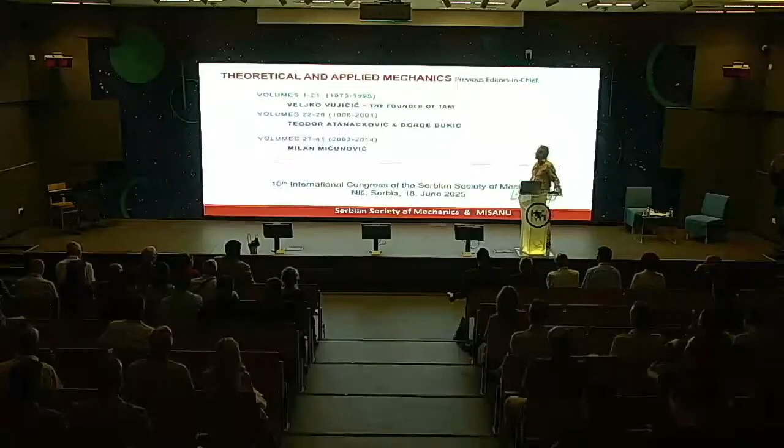The journal was established thanks to the leadership and wisdom of the late Professor Veljko Vujičić, who served as the founding editor. Then this torch of editing was carried on by Professors Teodor Atanacković and Đorđe Đukić, and then Milan Mićunović. So let's thank our previous editors-in-chief for this tremendous work over decades.

We are trying to stay in touch with modern ways of presentation. As I told you, this is free of charge for authors and for readers. We have all our previous issues maintained online, so you have free access to all of them.

And here is again one piece of history. Here you see the first editorial board from 1975. At that time, as Professor Simic said, it was published jointly by the Yugoslav Society of Mechanics and the Mathematical Institute of the Serbian Academy of Sciences and Arts. In 1975, this was the first volume, the first issue.

And just 50 years later, we have this Jubilee volume, and here is the list of authors who contributed to this year's volume. So, in hard copy, our journal looks like this.

Once again, here are the basic data, and this is also our cordial invitation to all of you, to all members of the Serbian Society of Mechanics, to all scientists in the field of mechanics around the world, to our plenary lecturers, and to all participants of this Congress.

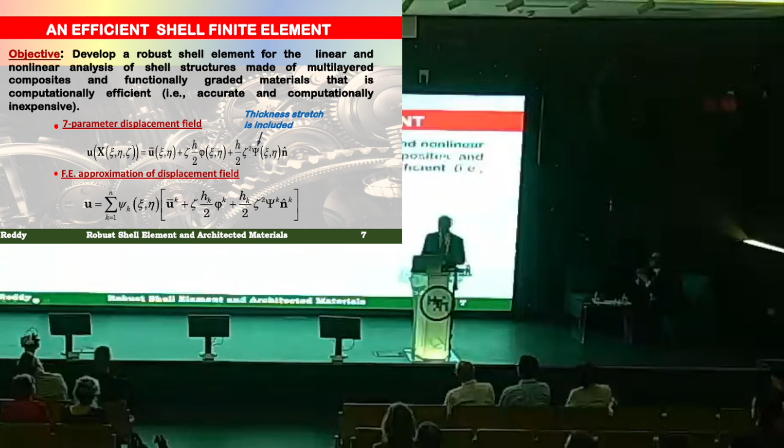So it is a displacement vector which is decomposed into in-plane, in-surface displacements, then rotations about all three normal axes, which is in the element phi. Let me see if this works. Yeah, good. So you can see this as a rotation, and then we add to that a degree of freedom, that is what I call thickness stretch. It allows a degree of freedom, allowing the thickness to change. It can reduce or increase depending upon whether it's a tensile or compressive load.

So then we go on to develop the finite element interpolation, and I will just show you a mid-surface of a shell. One other thing that we have done, not in the commercial code, is to use what we call spectral interpolation functions, because in order to get rid of all types of thickness locking, shear locking, Poisson locking, we need to use a higher order interpolation. The reason is, as I mentioned, the rotation functions and the translational displacements are not the same degree of interpolation. They require different treatment.

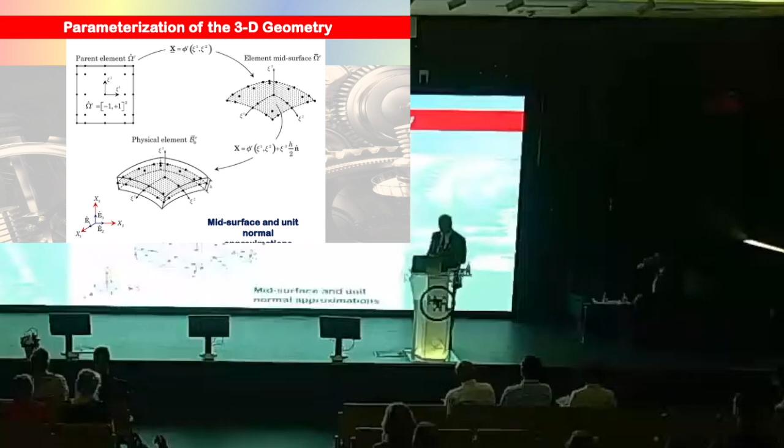But we don't want to use mixed interpolation because it's computationally difficult, both in terms of meshing and programming. So we tend to use equal degree interpolation, but a higher order, so that we can get rid of all kinds of locking. This picture shows the actual interpolation for different variables, and for the instantaneous location as well as the original location, shown by the capital X. We use the geometric interpolations for the geometry of shells, and since it's a large deformation problem, we use the Green strain tensor, written at the top of the screen.

Let me show you, right here, the Green strain tensor in terms of metric tensor components. Then when it comes to the strain displacement equations, because of the curvilinear nature of the shell equations, even though we start with the first order thickness interpolation, it goes all the way to the fourth degree of the thickness coordinate, as shown here.

So it is a question of where you want to cut off. We tried first with first order kinematics, retaining only the first term through the thickness, where Xi3 is the coordinate in the transverse direction to the shell. We also used what we call a 12 parameter model, not discussed here, just out of curiosity, to see if it brings additional accuracy. We found that the expense is not justifiable for the small amount of accuracy gained by including this quadratic term, so we neglected all of those terms in the shell theory.

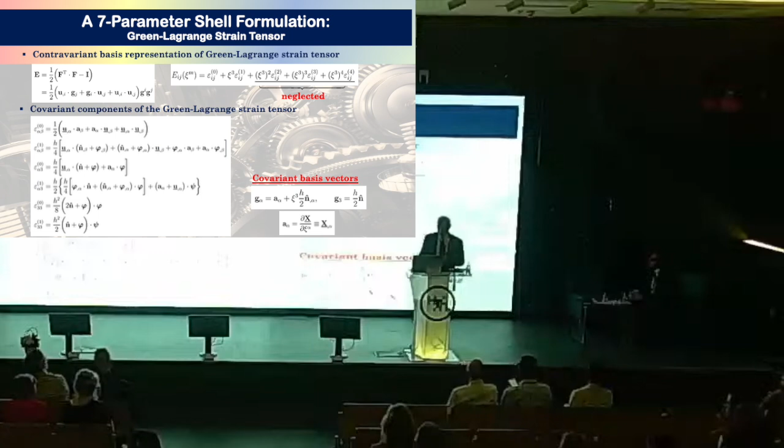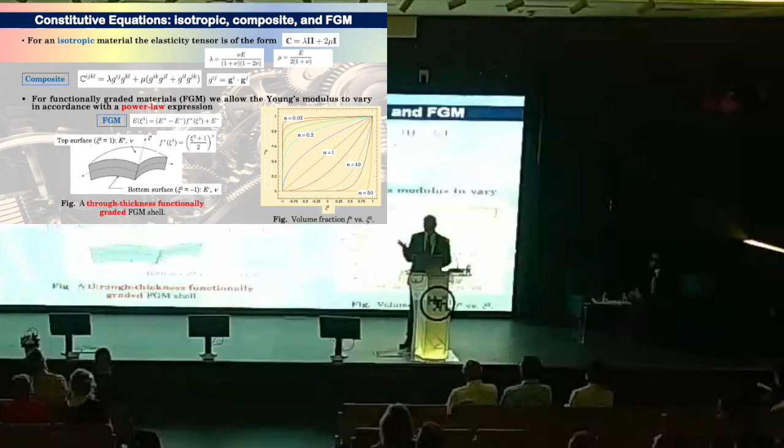The rest of the terms just show the number of terms in the strain displacement equations. In terms of the constitutive model, we account for isotropic, orthotropic, laminated structures, and functionally graded structures, where material can vary through thickness from one material at the bottom to a different material at the top. This is one thing that in recent years we are doing, bringing functional gradation of the material to get effective stiffness and strength at light weight. That's how architected materials and structures are being built, so that is really where the design is coming from.

As I mentioned about the spectral interpolation functions, the reason we need to use spectral functions is because they are well behaving. They are also Lagrange interpolation functions, except the distribution of the nodes is unequal. In the conventional case, if you have say some 10th degree polynomial, there would be 11 nodes in 1D, equally located, but they misbehave.

Okay, so you can see the typical commercial code will have p equal to 1 and 2, linear and quadratic. But you can go to p equal to 4, p equal to 8. So as you increase the degree of interpolation, one thing that you notice, there are more nodes going inside the element, right? You see a lot of nodes in the elements, and they don't speak to the neighboring elements. Only the nodes on the boundary of the element speak to the neighbors, right?

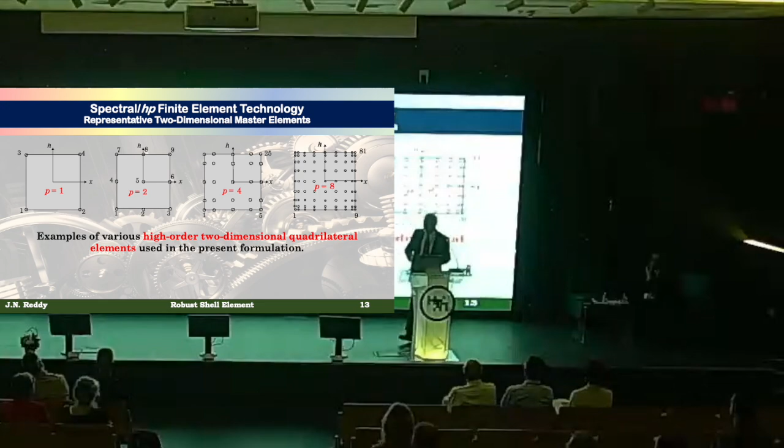Okay? So we can talk about other kinds of buckling phenomena or any kind of shear deformation. All of those are accounted through the first order kinematics. So this is another example. I want to show the importance of thickness stretch. So this is the internally pressurized cylinder. Okay, so, you think of a rubber balloon.

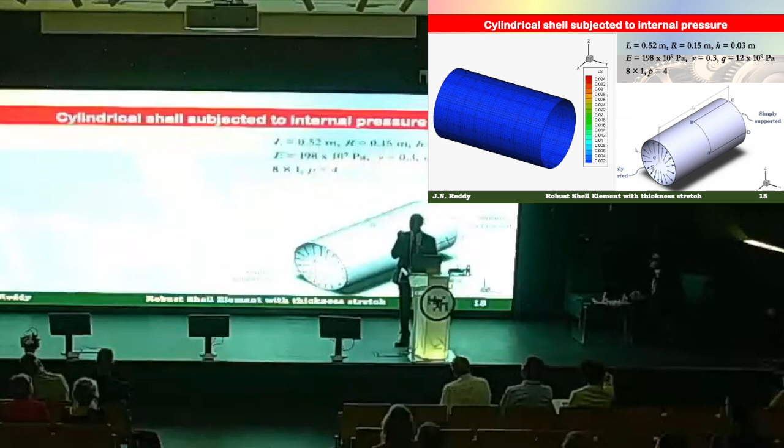When you take a balloon and start blowing air into it, what happens? It blows. But you can also see the color of the balloon changes because it's getting thinner and thinner. If you keep blowing, it will burst, because the thickness is not able to take the internal pressure anymore, right? So that means there is a thickness stretch, which is true, and I'm going to show here. Let me see if it works again. Oops, let me go back.

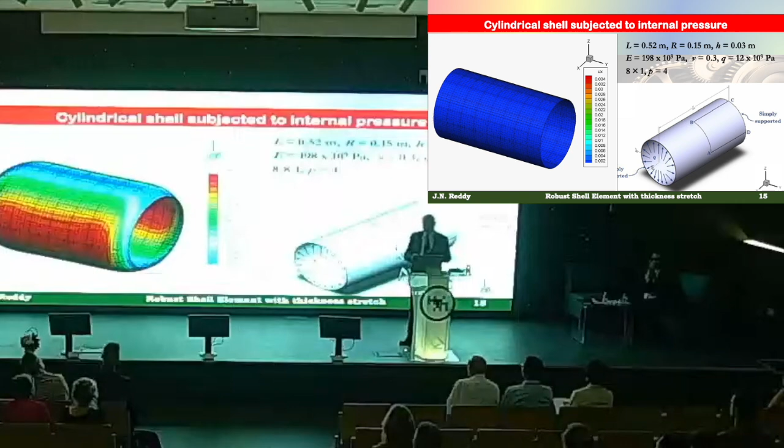Okay. So you can see the ends are held fixed, and so the internal pressure is going to make the diameter of the shell increase. So the shell diameter will increase only by making the shell thickness change. Right? Material has to flow from somewhere to create a bigger shell. So that's what you are seeing. And so if you really plot the

so this is the plot of the thickness change, delta H over H. H is the thickness, delta H is the thickness change. So I'm putting the ratio. It can change as much as 15 or 25. I showed 25 in the scale, but it goes all the way to 20%. Okay, but this has to be large deformation. I don't want you to think that every problem will have 25%. No. It has to be a large deformation problem.

All right. So we also show the stresses. This is very important. There are many graphs here, but I want to talk about one at a time. So the two most commonly used commercial programs for structures are ANSYS and Abaqus. Market-wise, ANSYS probably has 60% of the market, and Abaqus has 40%. But when it comes to structures, the percentage is reversed. Abaqus is most commonly used for structures.

So what you are seeing here is the stress we are plotting at a point, the load parameter versus the stress. And so the ANSYS and Abaqus results, they agree with each other. Okay? Those are the shell element results. But if you take the 3D, all right? 3D ANSYS and Abaqus, 3D elements.

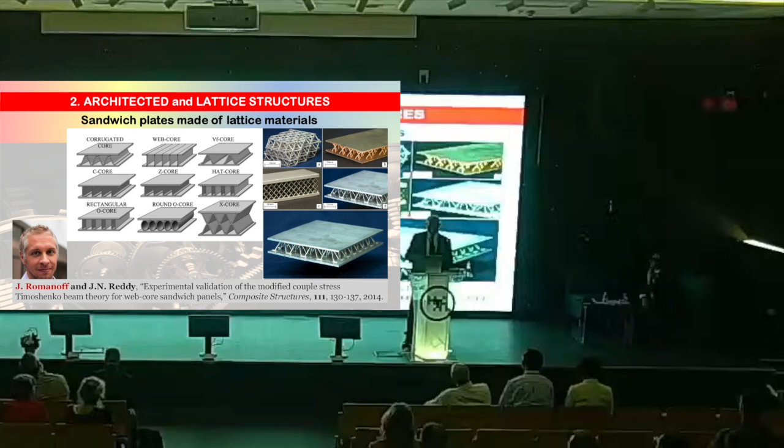So I worked with Jani Romanoff from Finland, and he was helping with experiments. And so what we have done is the following. So there are two possibilities. You can take an architected structure and replace it with a continuum model. But that is going to lose all the identity, because you don't know what the architecture is, other than you have effective stiffness coefficients, okay?

And the other way is to actually replace each one of those ligaments by a frame model, okay, 3D space frame. So that would be more accurate, but it will be many, many degrees of freedom, because there are millions of these ligaments. So what we have done is to do the first one, but we refine the theory. That means bring in a point rotation.

I don't know how many of you recall, our classical continuum mechanics does not allow a point to rotate. It allows the point to translate. Or 2 points connected can rotate, but a point itself cannot rotate. Okay, so this is where the micropolar theory comes in. Okay, so that's what we have done.

So you can see an architected structure. This is where Jani's PhD student, Anssi, had a Marie Curie fellowship to spend 2 years with me at Texas A&M. So they also did the experiments in Finland. You can see this is a very simple architected structure with a web core, top and bottom plates with a simple web there.

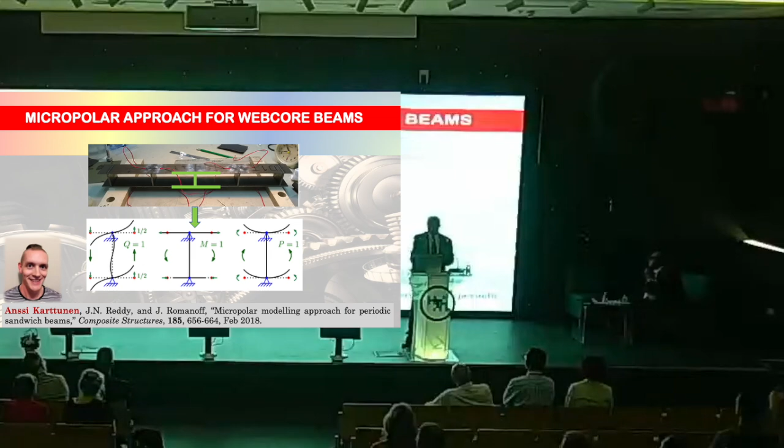So if you really exaggerate this deformation, what is happening is that web actually bends, okay, and it can even buckle, right? So how do we account for the web in a more realistic way? And that is where we brought this point rotation and were able to capture, as I will show in the next couple of slides. So what we do is take the actual architected plate, in this case a very simple sandwich structure with a web, vertical web.

We take a typical unit cell and use Abaqus or ANSYS to get the solution at the nodes of that typical unit cell. Then we come up with the actual theory, the plate theory. But except we bring the point rotation through psi x and psi y, that means we allow the rotations about the axis at a point, okay? So then we create a two-dimensional theory as opposed to shell type three-dimensional, and use the energy equivalence.

That means energy coming from that unit cell should be same as the energy the micropolar plate theory does. So we relate the degrees of freedom from the three-dimensional unit cell to the two-dimensional theory and calculate all the ABD matrices of a shell element. Okay, that ADGH. So we cannot write an expression for them, but we can get them numerically by comparison, as I showed with the transformation on the screen. Okay, so there is a lot of detail that I'm skipping, but I gave the general idea.

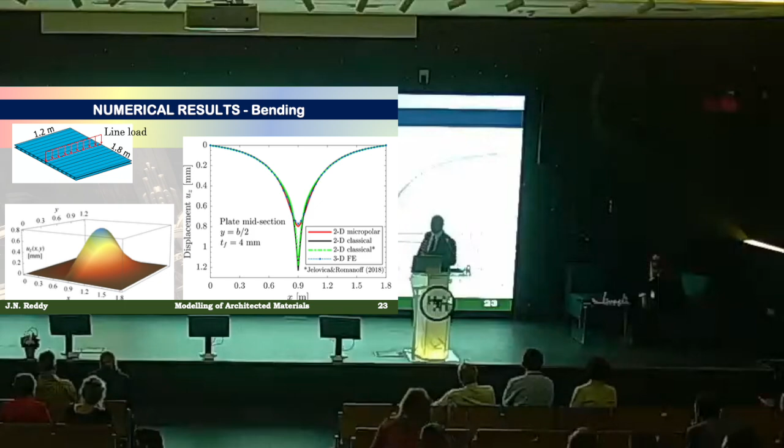So you can see the red curve is the 2D micropolar theory, that is ours. The blue is 3D shell finite elements. Okay? So you can see the micropolar theory is capturing the 3D response, whereas the classical one will have as much as 20% error. Okay? And we have done this for buckling as well.

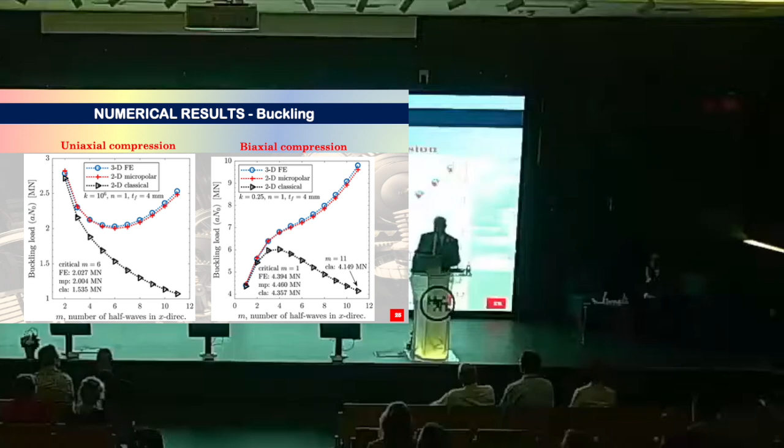Here this number of half waves is shown here. So that means even higher modes of buckling are predicted much more accurately, whereas classical theory really deteriorates with the number of half waves. And we did the similar thing for biaxial compression. Take the plate, compress in both directions. So once again you see the accuracy is very good between the micropolar theory and 3D finite elements.

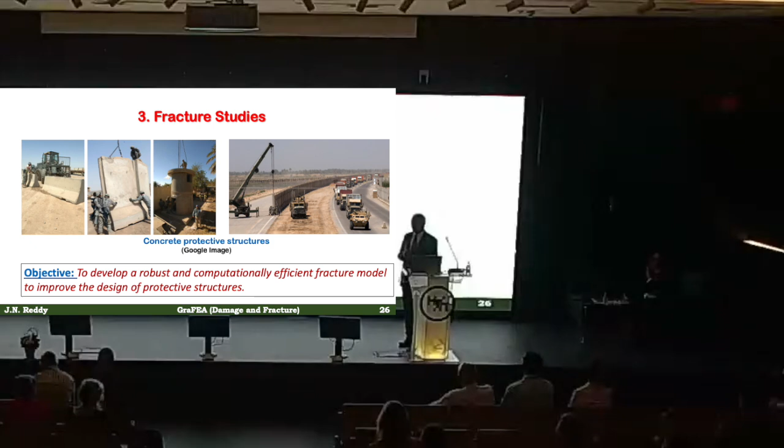So the third topic is fracture. And these are kind of not connected to each other, but this is a very important topic because everything that you talk about, whether it's buckling, architected structures, bending, all those, ultimately we are interested in when do they fail? What is the probability of failure? What is the residual strength of the structure? What is the life of these components? So that is why fracture is a very important topic.

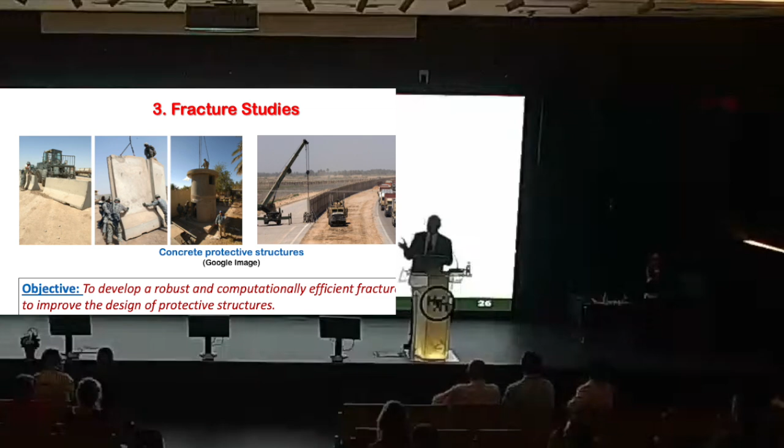The unfortunate issue with fracture is continuum mechanics cannot deal with fracture. I don't know how many of you closely understood that. Fracture mechanics is not a part of continuum mechanics. Okay? Because we cannot have an interior point become a boundary point. Right? When a flaw starts and coalesces into a crack, the crack is now on the boundary. So this is the problem with continuum mechanics. So we found a way to get away from it by creating some models. All of the models have some different flaws, but I don't want to just mention that without substantiating, so I will do that in a minute.

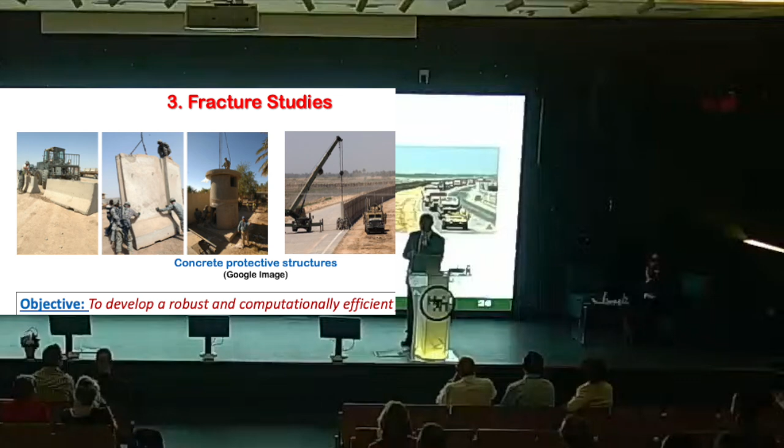So these are mostly, we are spending time on brittle and quasi-brittle materials. So this is a concrete slab, okay? And we want to actually model the fracture in concrete. And all of you know, I'm sure, concrete, even before it is in service, it has many cracks, just by the way it is made, the settling takes place, right?

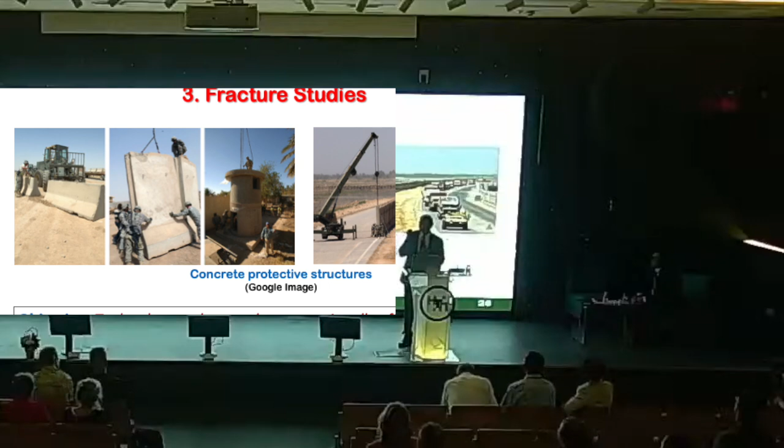And most of the conventional approaches, there are thousands of papers using XFEM, cohesive zone model, now phase field, peridynamics, but they all talk about typically a couple of cracks. Most of the time one crack. Okay? So if you have many cracks, only peridynamics-like ones have the ability to capture them, but all others deal with only one or two cracks.

On top of it, all of them require your understanding of where the crack is going to go. That human intervention is required so that you can lay the mesh, you can lay the cohesive zone elements. So this is almost like cheating because you already know where it is going to go. That doesn't happen in the real world. You don't know, other than simple problems where you know how the self-similar crack growth takes place. So we need a more robust computational technique.

So that is what we are interested in, and we want to develop a methodology that is not mesh dependent. You have to have a certain minimum mesh, there is no question. But as you refine the mesh, it has to converge. It cannot keep changing the state of stress. Okay? So that is what we are interested in. And we found, I will explain to you more idea-wise, that you have to bring non-local nature into it. And I'll explain what that non-local is.

So there are two major ways that people have addressed fracture. One is continuum-based models. That is where linear elastic fracture mechanics, continuum damage mechanics, XFEM, that means extended finite element, that means enrich the mesh in a certain way so that you can capture the singularity. Then the second class is bond breakage models. That means you assume that any two particles are connected by a bond, and it breaks when that bond strength, measured as a strain or stress, exceeds the allowable. So that is a very neat thing actually. So that is the non-continuum bond breakage model.

So the problem with bond breakage is it's not coming from continuum mechanics, and continuum mechanics has saved us a lot of frustration, because it has helped us solve a lot of engineering problems in the world. So it is a very nice tool. But when it comes to fracture, there is an issue.

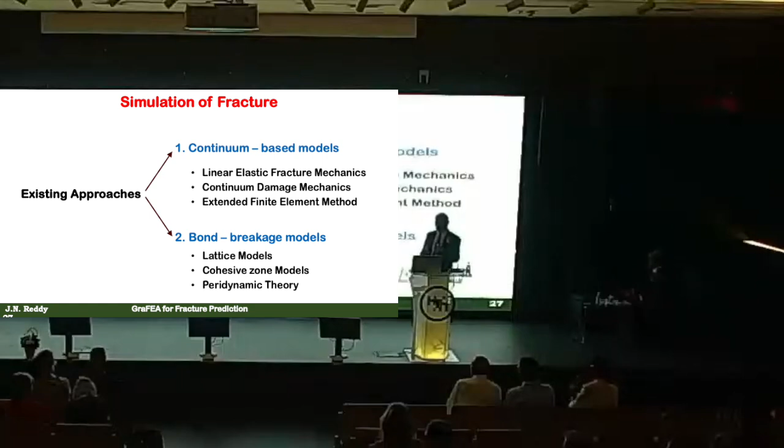That is where we need to use continuum mechanics models, because cracks are not everywhere. There are only a few places. So we should have the continuum assumption in most of the system or structure, and only in a few places we need the fracture. So we need both bond breakage and continuum ideas in one, and that is what this GraFEA is. Graph-based finite elements. There is no new finite element here. Same old, except we bring non-locality.

So the key challenge is the computational cost when it comes to, again, fracture. So in all of this, the common thing is we want to have simplicity and robustness. That means we should not have these knobs and fixes that only people who understand the problem can play with. The users are not like that. So they are depending on your ability to make it robust enough so that they don't have to think too much. So this is where we want to reduce the computational effort.

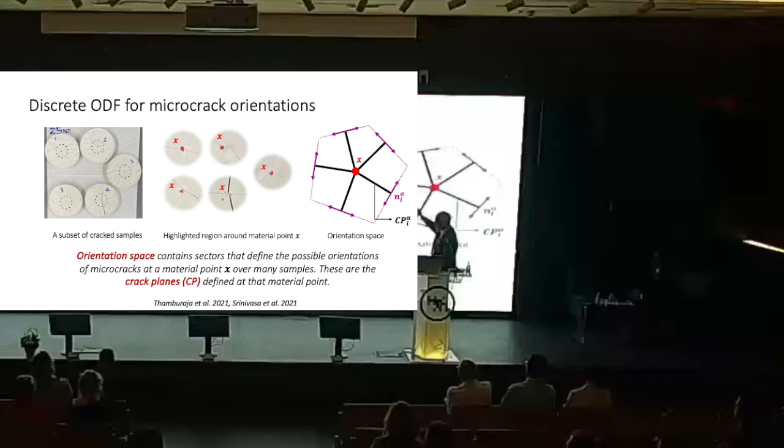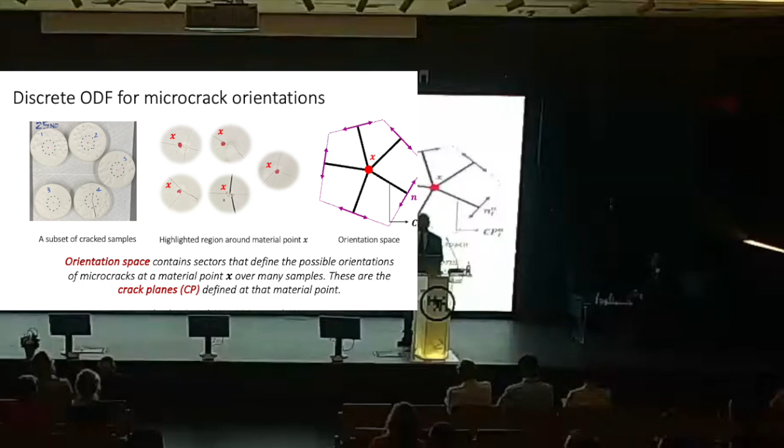By the way, Bazant's microplane model required 32 planes. And he doesn't have any answer why. But that's how he says it: it doesn't work unless you use 32 planes. He was with me 2 months ago. I invited him to give a seminar to discuss the microplane model. So we created this microplane model of our own, which only required 3 in 2D and 6 in 3D.

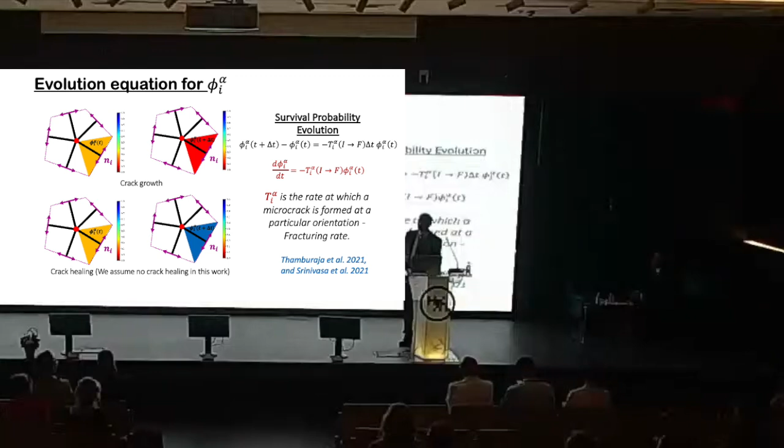So the evolution of this survival probability is what we monitor. And then we have a rate equation for how it evolves. We found that we need to have a certain number of parameters that need to be physical, including Poisson's ratio, modulus of elasticity, the rate at which the strains evolve, and strain rate effects themselves. So all of these we bring in through our non-local GraFEA model.

By the way, papers based on this work have appeared in very top-notch journals, Royal Society of London, JMPS, Extreme Mechanics Letters, and so on. If you are interested, I would be happy to send you them. But not only that, I will be happy to give you the program, the UMAT. The finite elements is not new here. What we did in terms of non-locality is new. So we created a UMAT for Abaqus. I will be happy to give it to you, so that you run it, use it, tell us your experience and how we can help.

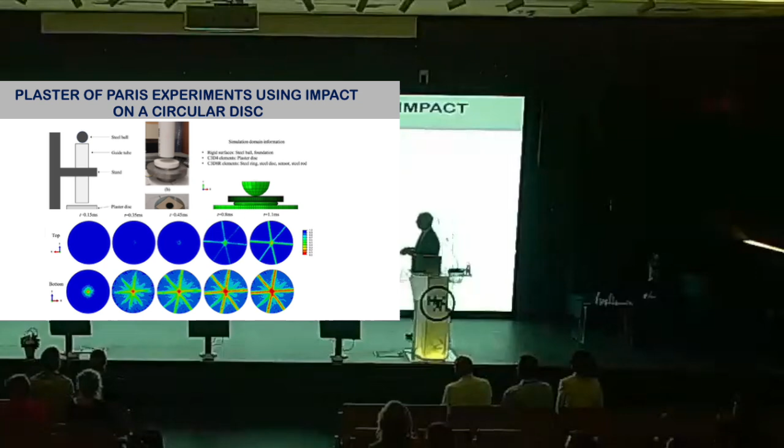So we started doing our own experiments, simple experiments - drop tests on plaster of Paris material. We created these discs and used a tube to drop a steel ball.

Then we model using finite elements, and you can see the top of the disc and bottom. When it is coming from the top, fracture actually initiates at the bottom, not at the top, because of the tensile wave that comes from the bottom.

So you can see those are the GraFEA predictions, and there are experiments which also show this - those are experiments from Bazant and his group. We are able to predict very close to what is observed in experiment.

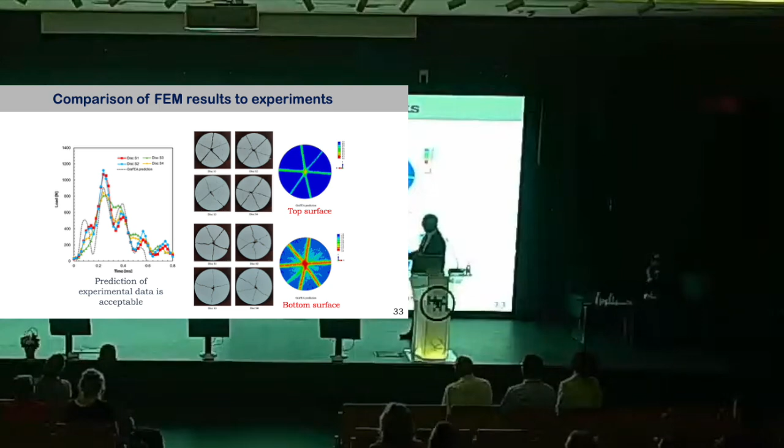By the way, different experiments show slightly different results. Even experiments change - you don't get exactly the same thing every time you do the drop test. So we were able to capture those using GraFEA.

So this is the cracking, it begins again at the bottom, and I have a movie, but I don't know... so you can see, all right. I'm going to just close this. So again, on the left are the experiments, on the right are computations. We are able to predict very well in terms of qualitative understanding.

Okay, I will close this lecture by summarizing three topics. First, the higher order shell element - higher order in terms of interpolation is necessary to get rid of all kinds of locking. This is where the commercial codes have to change.

The second is non-local ideas to capture or represent architected materials more close to reality, short of representing every ligament with a frame element. And GraFEA is the only computational...

...thermodynamically consistent approach. By the way, the phase field and peridynamics methods both have an exponentially growing number of publications, but yet they are thermodynamically inconsistent. You should read the critical papers by Bazant - he says these are nonsense, but nobody seems to pay attention. They keep writing the papers.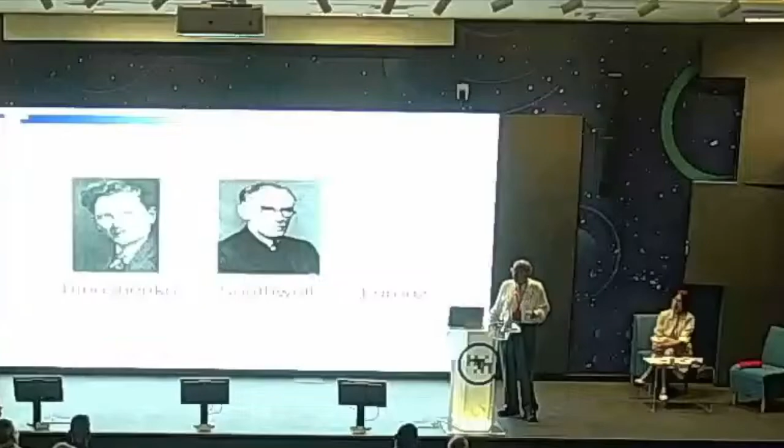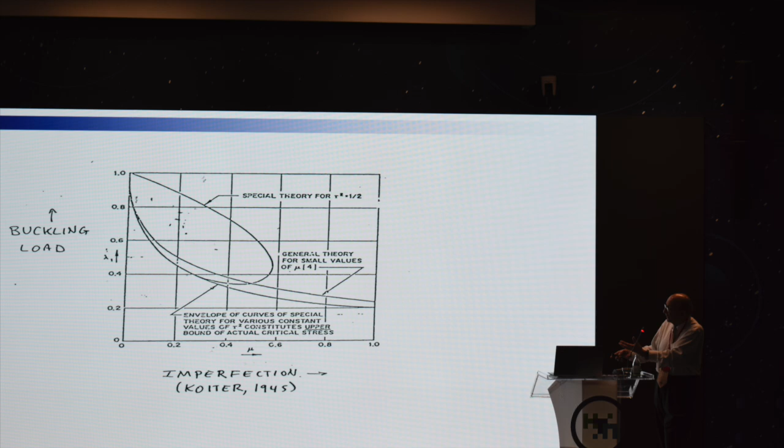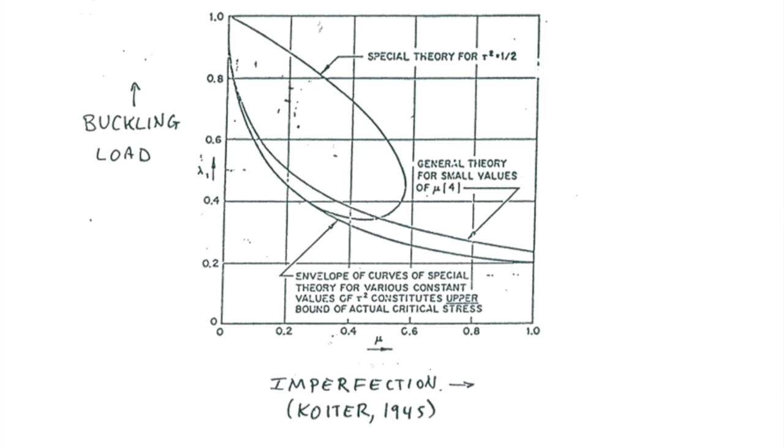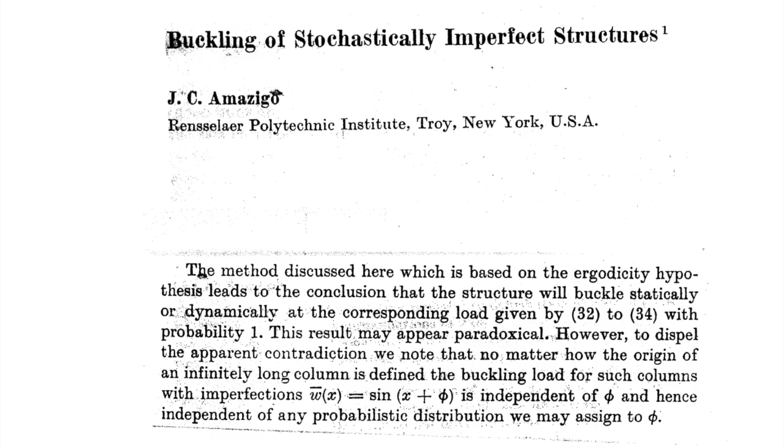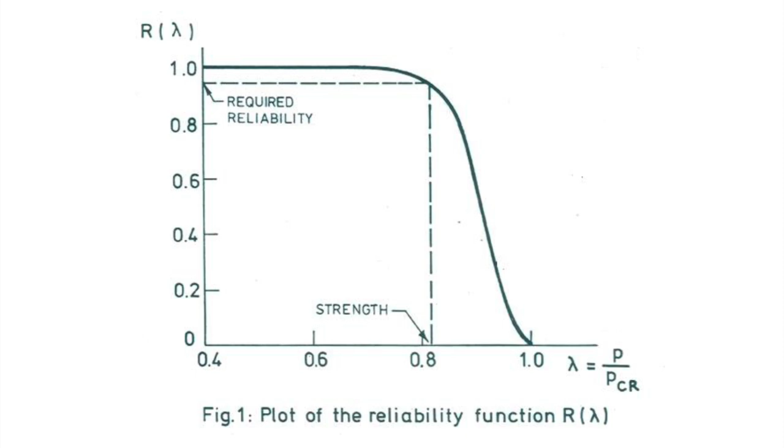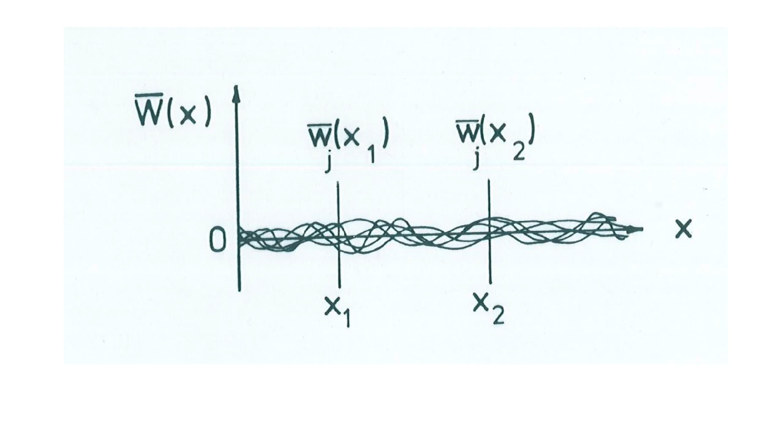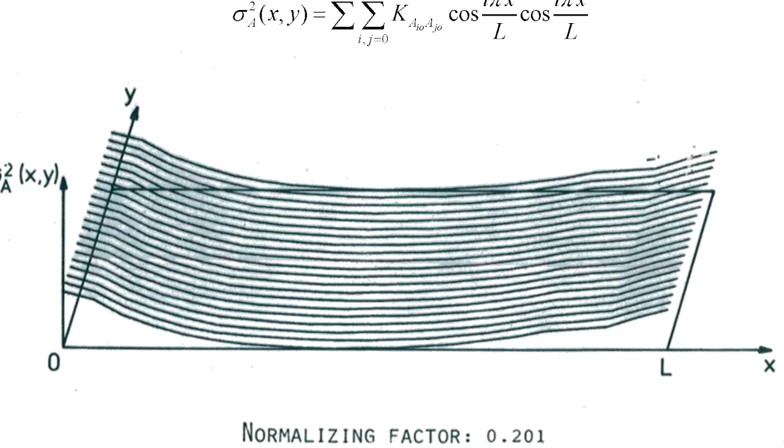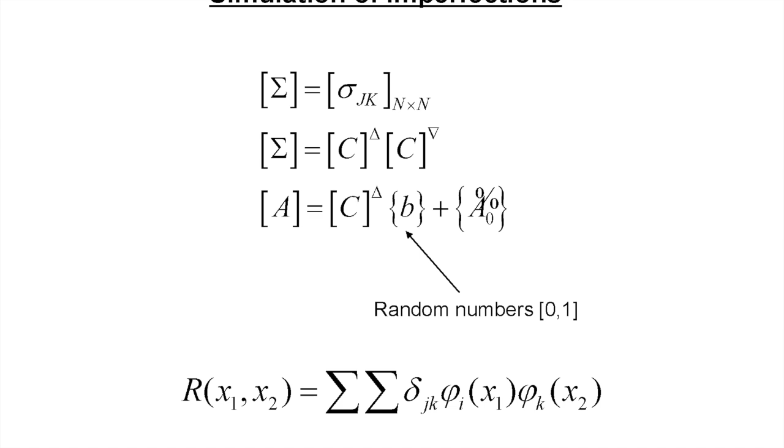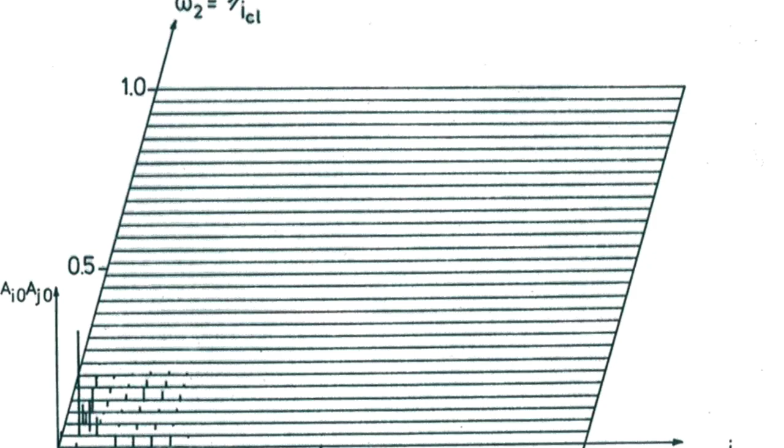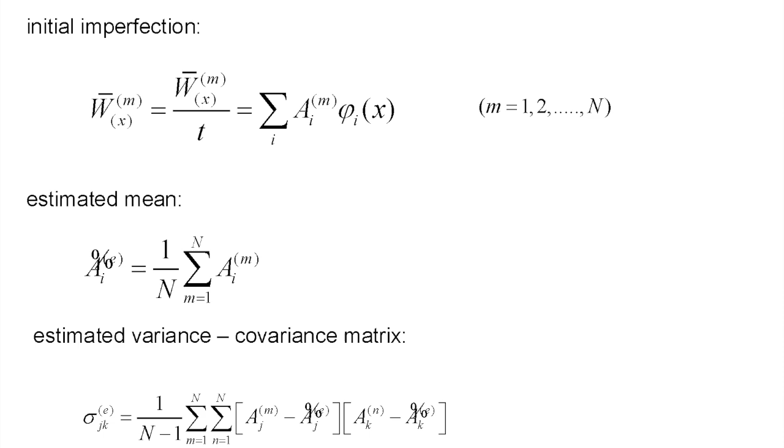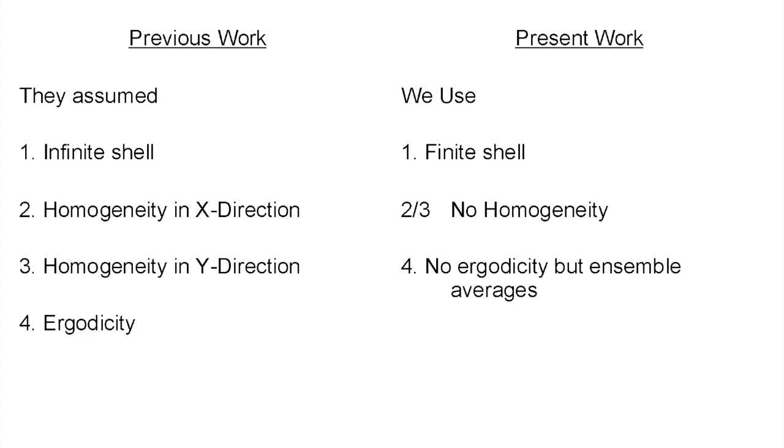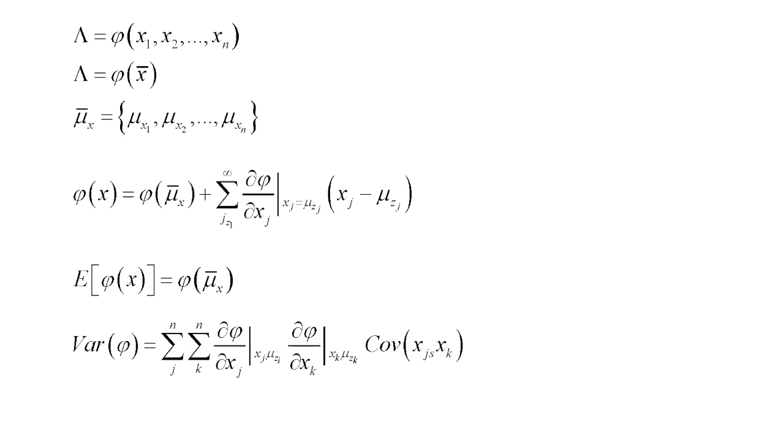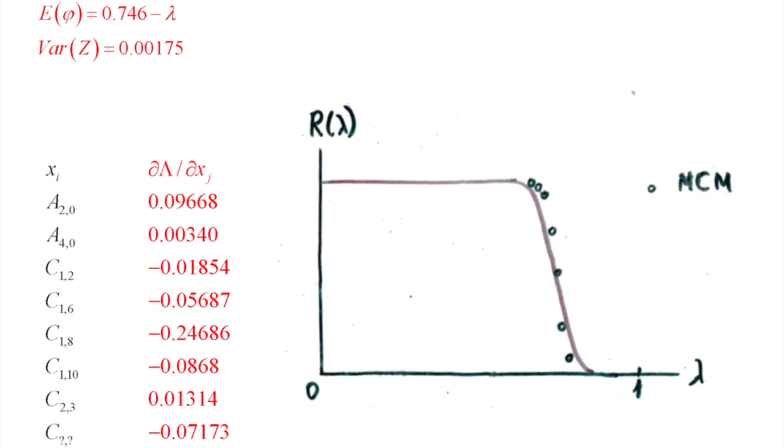Why? Because this problem has a solution: W of x equals A1 K1(alpha x) plus A2 K2(alpha x) plus A3 K3(alpha x) plus A4 K4(alpha x). Because it's a free vibration, there is no loading. Now from W of 0 equals 0, we get A1 equals 0. Do you remember? Because K1 is not 0 at 0, it equals 1, the rest are 0. So when I substitute 0, I get A1 equals 0. The second derivative equals 0. You remember that the first derivative of K3 equals K2, first derivative of K2 equals K1. So that means...

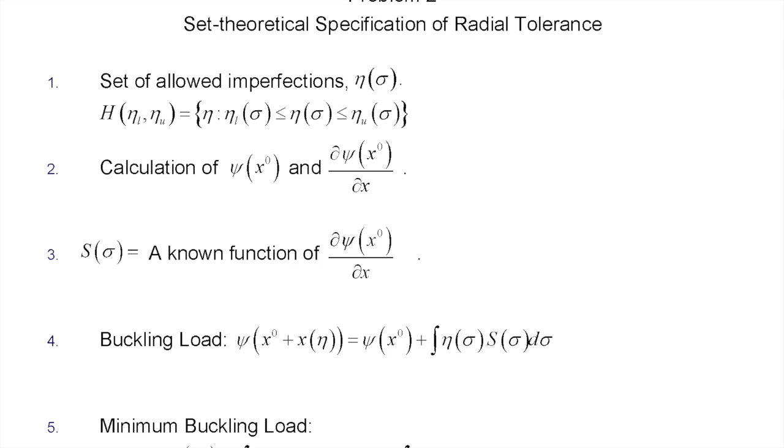Why? Because this problem has a solution: W of x equals A1 K1(alpha x) plus A2 K2(alpha x) plus A3 K3(alpha x) plus A4 K4(alpha x). Because it's a free vibration, there is no loading.

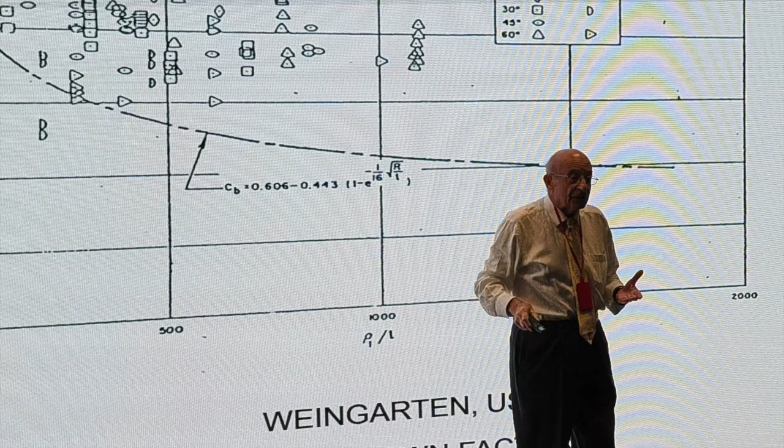Now from W of 0 equals 0, we get A1 equals 0. Remember, because K1 is not 0 at 0, it equals 1. The rest are 0, so when I substitute 0, I get A1 equals 0. Second derivative equals 0. Remember that first derivative of K3 equals K2.

Of numerous scientific meetings, also two Congresses of Mechanics, and also numerous international symposiums of nonlinear dynamics and nonlinear oscillation, not including some of his books published by Građevinska knjiga and also Zavod za izdavanje udžbenika in Serbia. This information is very important because you must know that in this period books were published not like now with PDF on computer, but by a very manual process of composing all the order and all the pages. This was very difficult, and the result is very important.

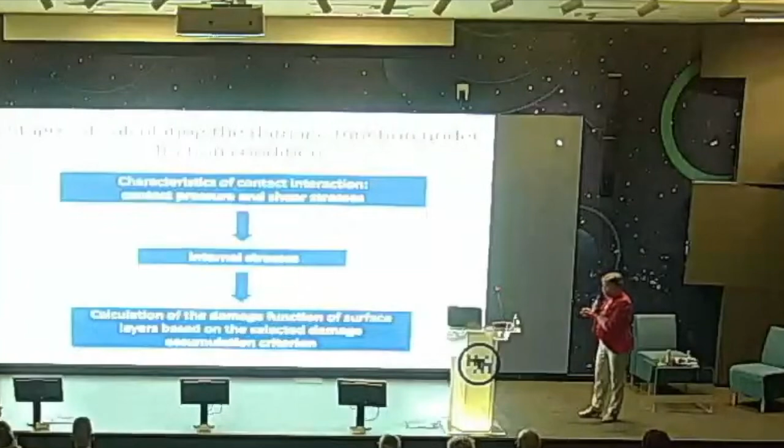Of course, due to contact interaction, we have contact stress concentration in the contact zone, and also internal stress concentration in subsurface layers near the contact. It's very important to develop methods to calculate the contact stresses, then internal stresses, and then to calculate the damage functions under the surface and predict what happens in time during the contact interaction of different parts of the tribojunction.

Now we go to the analytical study. I used as an example the problem of rolling contact of an elastic ball on an elastic half space. As was shown by Reynolds, in the contact area there are sub-areas where stick of the contacting bodies takes place, so the same velocities of deformation of the two bodies, and a slip zone, where there is slippage between contacting surfaces.

So we formulate the boundary conditions in these two subregions. In the stick subregion... it does not work. The pointer does not work, I think. So in the stick subregion, the shear stress is less than the limiting shear stress, which is the coefficient of friction multiplied by contact pressure.

And based on this wear calculation, this is the third line, we can formulate the mathematical analytical approach to study the kinetics of the wear on macro scale. So to calculate the pressure distribution, shape of the worn surface at different stages of the process at macro scale.

So we can use the residual stresses, we can use some intermediate layer between surfaces to control the process, and we can use microgeometry of contacting bodies as the parameter which controls the process of wear and the process of fatigue fracture of contacting bodies in cyclic loading.

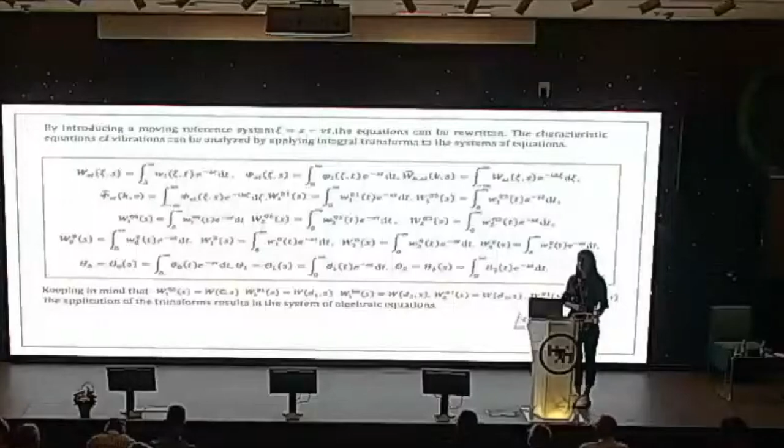So now, by introducing a moving reference system, the previously written equations can be rewritten, and the characteristic equations of vibration can be analyzed by applying the integral transform to the system of equations. The transforms are presented here, and the application of the transform results in the system of algebraic equations for both models. And after using the inverse Fourier transformation of the algebraic equations, and by setting the values xi is 0, xi is d1, etc., we can obtain two systems of algebraic equations with respect to the Laplace displacements of the contact points. First is for the first model, and the second is for the second model.

The existence of a non-trivial solution for both models depends on the condition that the determinants of the matrices G1 and G2 are equal to 0, and the stability of the models is analyzed through an investigation of eigenvalues of the characteristic equation. If at least one root of the characteristic equation has a positive real part, the vibrations of the complex moving oscillator are unstable, and that's the criterion for determining the instability of vibration.

So now the solution method and criteria of stability. In order to divide the parameter space of the model into regions with different numbers of unstable roots, that is, the stable and unstable zones, the D-decomposition method is employed, and as a complex variable K0 is considered, which is the stiffness of the primary suspension. By using the D-decomposition method, we can determine a relative variation of the number of unstable roots, however not the number itself. That can be achieved by applying the argument principle, and the level of instability is determined according to the number of appeared unstable roots for each segment of primary suspension stiffness. And parameter analyses are performed for the supercritical case, when the velocity of the complex moving oscillator is higher than the critical velocity.

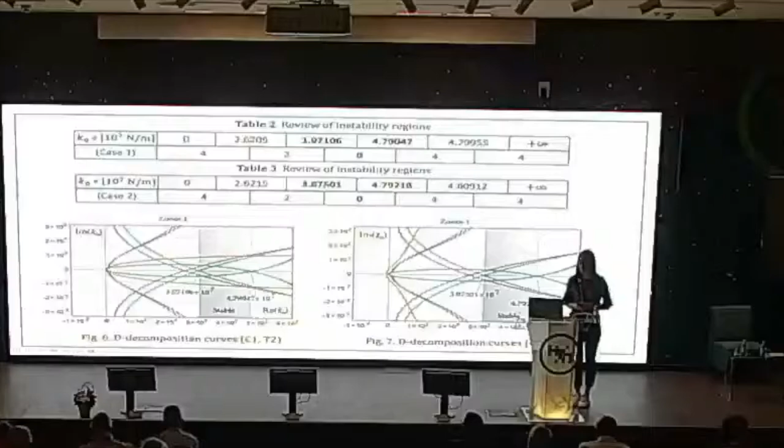We can conclude that by increasing the damping coefficient of the connection between the stabilizer and the car body, the stability region has a slight shift toward higher values of K0, the primary suspension stiffness, as we can see here. And we have a slight reduction of the stability region, but the change is not very big.

Then we consider the next two cases, the influence of increasing the stiffness of the connection between the stabilizer and the car body. In this case, a shift of the stability region can also be noticed, but now a bit toward the lower values of the primary stiffness, and there is a bit of increase in the stability region, but again the change is not very big.

Case 5 is the case when the stabilizer mass is reduced, and this case has the broadest stability region compared to all the previous cases. But we can see from the first 5 cases that variation of the stabilizer mass and the parameters of the connection between the stabilizer and car body doesn't greatly affect the stability region.

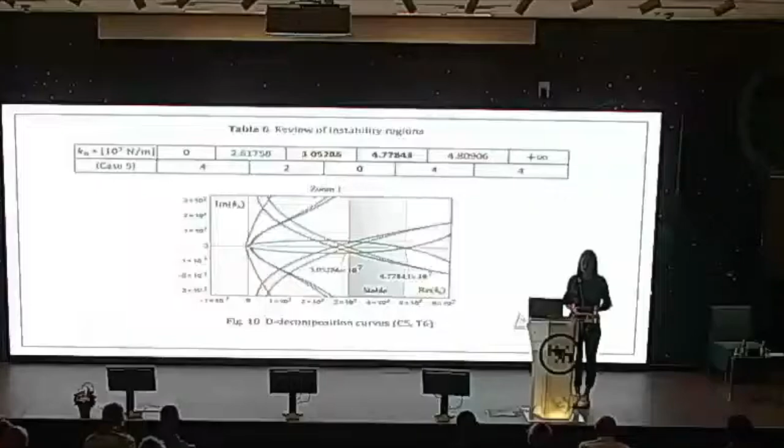So now we consider all these variations for the higher mass of the car body. First, again, the increase in damping coefficient of the connection between the stabilizer and the car body. In this case, the change follows the same trend observed for the lighter car body, but the effect is a bit more pronounced, since we have the shift in the stability regions toward higher values of the primary stiffness, and also a bit of reduction in the stability region.

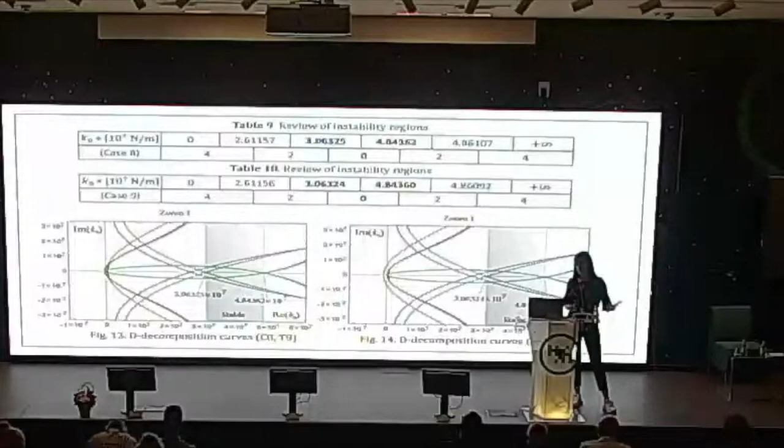Next is the case when the stabilizer is connected to the heavier car body again, but now we are increasing the stiffness of this connection. In this case, the stability regions remain almost the same. We can see the trend observed for the lighter car body, but the change is negligible in this case.

And the last case is case 10. It is the case where we have the lower mass of the stabilizer, but the higher mass of the car body. And this is definitely the broadest stability region compared to all previous cases.

It extends beyond all previously considered stability regions, but definitely for the case when the stabilizer is connected to the car body, the change in the considered parameters doesn't affect greatly the stability regions. So next are the results presented for the second model.

First for the lighter car body, then for the heavier car body, which are cases 3 and 4. Then cases 5 and 6 consider the influence of increasing the stiffnesses of this connection and the variation of those stiffnesses. And case 7 is where the mass of the stabilizer is reduced. So first, here are results for cases 1 and 2.

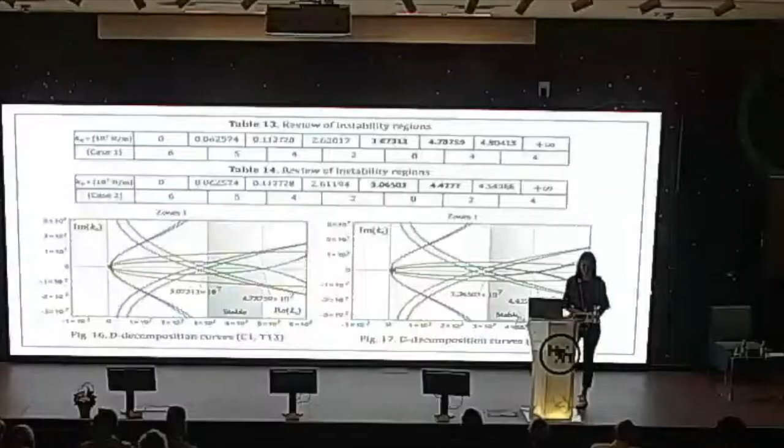So we can conclude that in this configuration, the variation of the damping of the connection has an influence on the system, and now we are considering the influence of increasing the damping of this connection, but now for the higher values of the car body. And in this case there is an even bigger reduction of the stability regions, and there is even one more instability region for the higher values of the primary stiffnesses, since we have one more instability region with 6 unstable roots as presented in the table. So definitely the damping parameter of this connection influences greatly the stability of this configuration.

Next are the results for increasing the stiffnesses of this connection, for the heavier car bodies, and in this case the stability regions are not very much affected. There is quite a little change in the stability regions. And the last case considered is the case when the mass of the stabilizer is reduced, but the heavier car body is still considered. And in this case, we can see also that the stability region is practically the same as in previous results. So it means that the mass of the stabilizer in this configuration doesn't greatly affect the stability regions.

So this study analyzed the vibration stability of a moving oscillator on a continuous viscoelastic beam foundation system, comparing two configurations with an additional stabilizer, one attached to the car body and the other to the bogies. The characteristic equations were derived, and stability was assessed using the D-decomposition method and the argument principle.

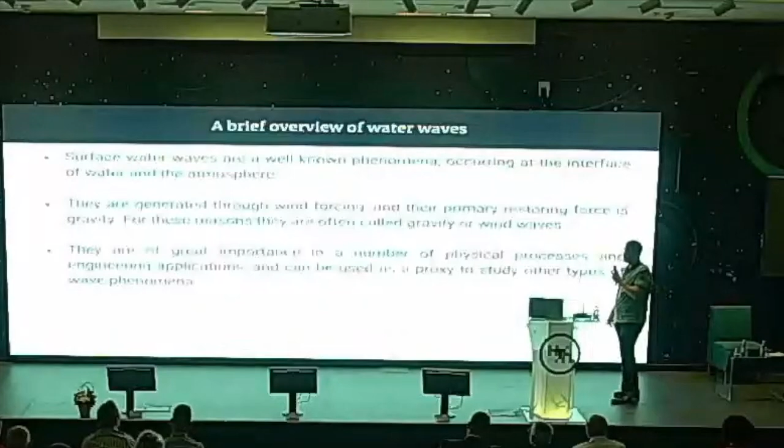For these reasons, they are often called wind or gravity waves, although the latter kind of dropped from use because now gravity waves are something else usually. They are of great importance in a number of physical processes, engineering applications, and you can actually use them as a proxy for many other types of wave phenomena. For example, they have been used to simulate problems in optics.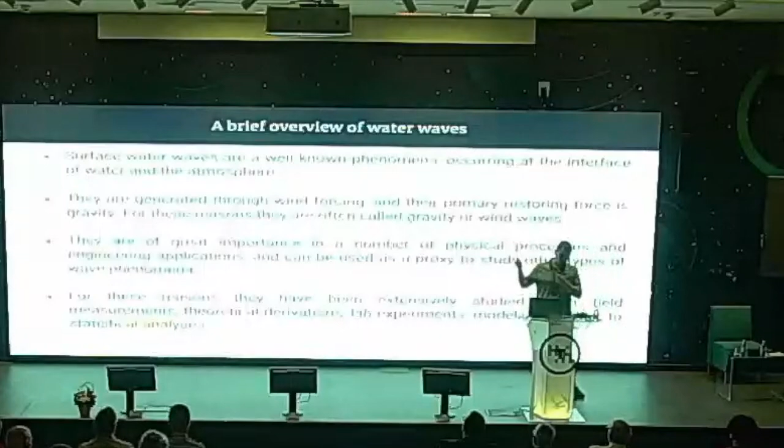For these reasons, they have been extensively studied, all the way to the Roman period. They definitely did take into account wave properties when they were designing their ports, harbors, etc.

At their most basic, they are simply a disturbance of the water surface, or some disturbances of the water surface, that is propagating in time and in space.

In nature, waves are propagating in all directions, all frequencies, and to really quantify it, you have to give some statistical description, which in waves is the spectra, essentially a distribution of wave energy, proportional to the square of amplitude in frequency.

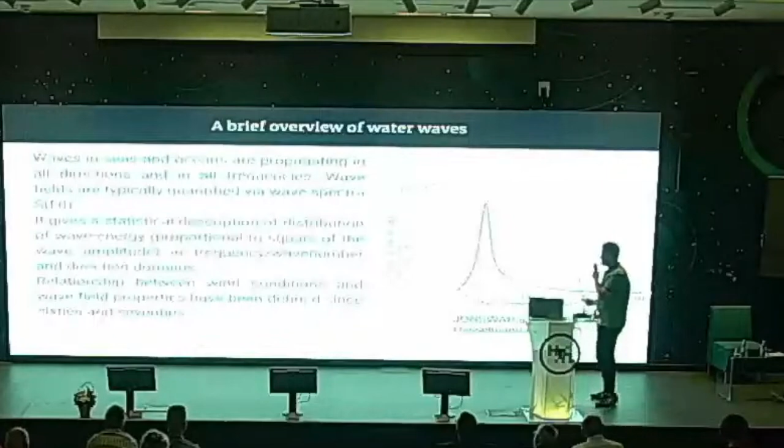All the way back to the 60s and 70s of the last century, people more or less understood the relationship between wind speed, atmospheric conditions, and local wave conditions.

But in oceans, you have many different processes, different time and spatial scales, starting from tiny bubbles all the way to El Nino kind of long-term motions.

They are not directly generated by wind, but rather by other waves. They also sit at the intersection where gravity is the primary restoring force for higher frequencies, and Coriolis force is the primary restoring force for lower frequencies.

I'll just mention that when someone mentions infragravity waves, it's not immediately obvious what they mean, because many different definitions have been proposed, starting from their generation mechanism, which can have many different mechanisms, to the nature of the dispersion relation. The most common one, and the one used here, is frequency range, defined as the range corresponding to wave periods of 30 to 300 seconds.

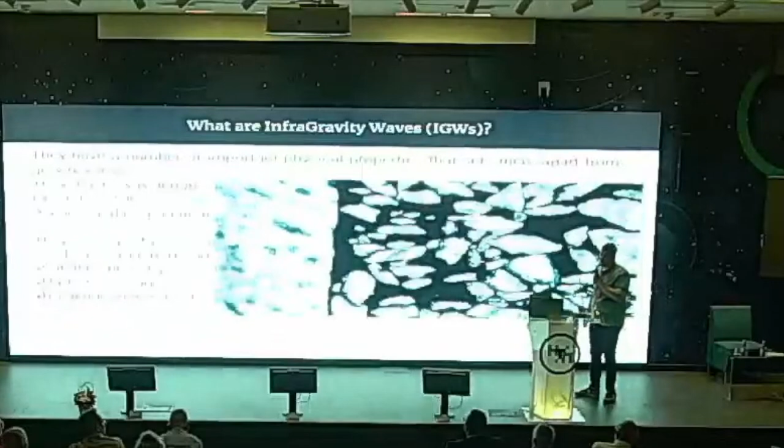They can lead to breakage of ice sheets, and they produce seismic noise which is often called earth hum. So this is kind of when IG waves hit coastlines, due to stresses at the bottom, they generate this kind of hum that was measured for a very long time, decades, but only at the end of the 20th century was it discovered that this is the reason for it.

But despite all of these effects, IG waves remain in a sense - there is a gap in how they are studied. Study of the oceans is standardized in a lot of ways. When environmental agencies and groups model oceans, there is usually an agreement on what quantities are used to describe how the ocean is modeled. Then there are also international organizations like the UN which defined what the most cost-effective parameters are that should be measured and what constitutes a good measurement.

And to address these gaps, a group was formed which is headed by Professor Yaron Toledo, and co-headed by Vika Grigorieva, Gala Krish, Christie Hegermiller, Susan Stoll-Hensel, and myself. Besides the six of us, there are around 20 to 30 other researchers participating in this initiative.

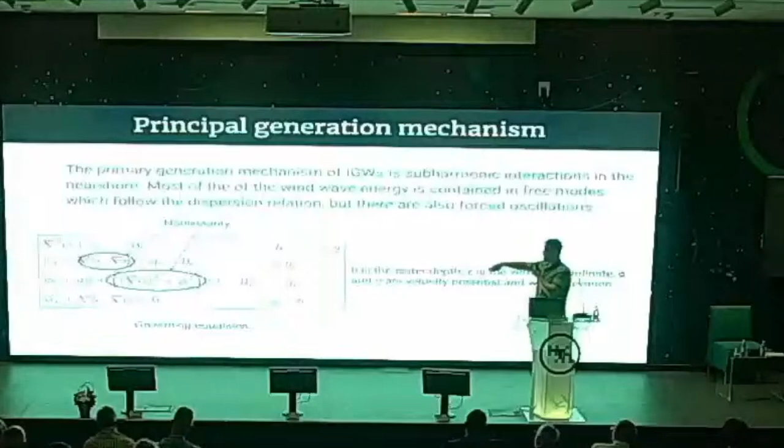Here you can see the governing equations. You have first the Laplace or continuity equation. Then you have two boundary conditions at the surface and one at the bottom. I'll just mention that nonlinearity enters through the surface boundary conditions.

The most simple way to consider this is you have two simple sine wave solutions. When you multiply them, you have a wave at the difference frequency, a bound wave at difference frequency, and you have simply two propagating waves. When you sum them up and take nonlinearity into account, you will see that you have this kind of bound motion, shown in the dashed line, which represents the infragravity wave.

And typically in the near shore, this is the most energetic method of generation of infragravity waves.

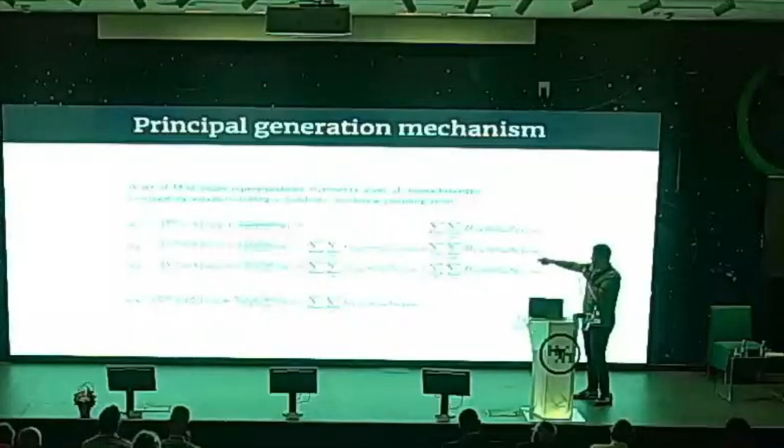You have a mild slope type equation, and you have let's say n different wave modes. They will all interact, where phi is the velocity potential. They will all interact to transfer energy to lower modes as well, which is represented by these first terms on the right-hand side.

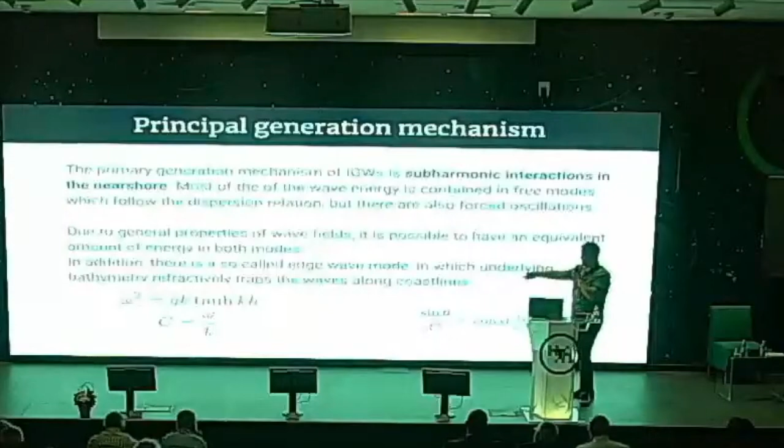It is typically the case that if you look at wind waves, gravity waves, most of the energy is in the free mode. But for infragravity waves, it is actually often the case that you have significant energy in both the free mode, which follows the dispersion relation, and the bound mode, which is essentially a forcing by free waves.

But you also have, which is unique to infragravity waves, edge waves. Water waves, similar to light, are refracted. For example, you are well aware that when you look underwater, light is refracted. Similarly, water waves are refracted by changes in bathymetry, and you can have waves that are essentially trapped along coastlines, the so-called edge waves, due to refraction of rays by bathymetry.

So you can see these waves propagate from deep to shallow water, and this is how it would practically look, more or less, with the x-axis representing the coastline, let's say.

Now, in order to model this all on global scales, it's not really possible to use a mild slope equation, especially since this is only one method of generation. There are many other proposed methods which can all have, cumulatively, when you take them together, a significant effect.

So it's necessary to give some kind of statistical description, and this is through a so-called wave action equation, n being the wave action. The terms on the left-hand side essentially describe propagation of wave action through space, the domain, as well as frequency, or rather wave number and directional domains. And on the right-hand side, you have a sum of source terms, which are essentially sinks and sources of action.

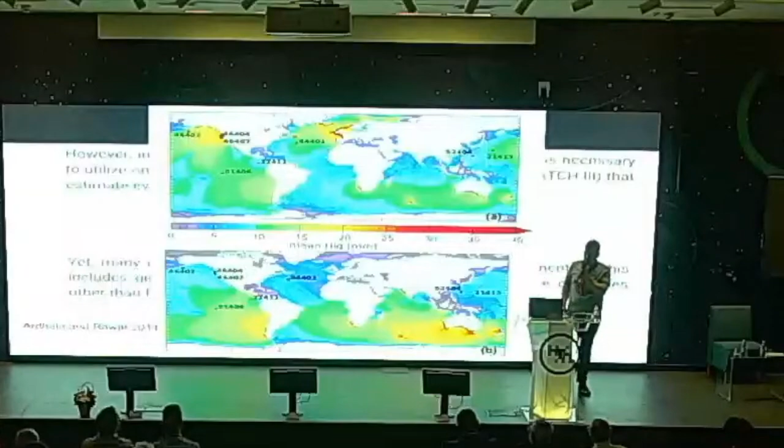The major problem is that many generation mechanisms are not implemented, and the whole problem still needs to be studied, especially since even theory is in most cases not well developed. There are already some models of IG wave generation, but they are purely empirical and don't account for a lot of IG wave properties.

I think I will quickly go over the measurements part. In order to develop all this new theory and modeling perspectives, it's a very good idea to have something to check against, something to serve as a guide for initial conditions, and to get a sense of what's a good description of reality.

The most common method of measuring IG waves was through pressure cells. It's by far the easiest method. You just drop something in the water, and pressure cells can be deployed all the way to 10 kilometers, all the way to the bottom of the ocean.

The pressure response of waves can be described in the linear case like this, where this function k decays with the vertical coordinate. But because IG waves can have wavelengths that are tens of kilometers, the pressure disturbance can still reach the ocean bottom.

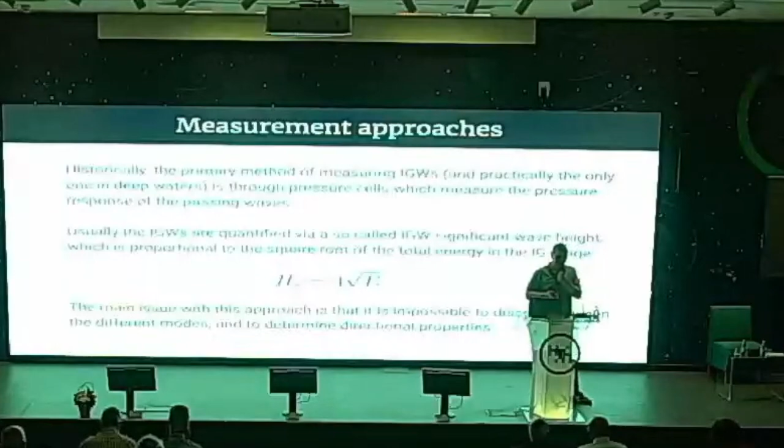It's also a question of how do we quantify what we measure, and typically this is simply done through a so-called significant wave height, which is proportional to the square root of total energy in this frequency range. The main problem with this approach is that it's not really possible to determine the directional properties, or the nature of the dispersion relations you have.

You have free, bound and edge modes, and you can't really deduce which is which just from single point measurements. But it can be useful to derive a kind of climatology of IG wave energy. This was actually done some time ago.

More recently, people have been proposing alternative methods. Sonic devices called ADCPs can actually measure a full profile of velocity, from which you can determine IG wave properties.

An array of pressure cells can also be utilized to similar effect. Here you can see one example where a lot of pressure cells were deployed and their data was used to successfully determine IG wave properties.

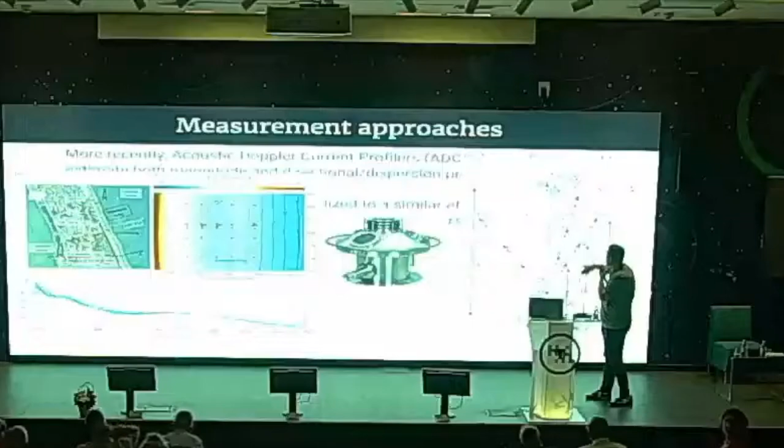Here you can see an example of an ADCP, which essentially emits sonic beams that are reflected back from impurities in the water, and these reflections are used to estimate velocities. Here you can see an example of deployment at, I believe, 50-meter depth.

In ice-covered seas you have to have different means of measurement, and the motion of ice itself is actually used to determine wave properties. For this purpose many different instruments, from meters deployed directly on ice all the way to satellites, have been utilized.

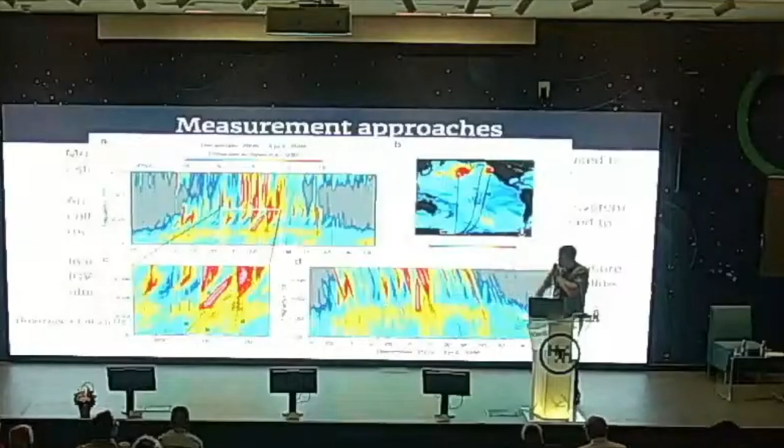Essentially one of the main goals of the initiative is to extend the definition of one of the essential ocean variables, which is kind of done by one of the organizations we mentioned. We hope to include definitions of what is a good measurement, and to propose what new techniques and instruments can be used.

In addition to all of this, we are currently writing a review paper in which, besides modeling, theory and measurements, we also hope to cover data, both in storing it, reading it, accessing it, as well as data-driven solutions and lab experiments.

This is to conclude. We hope to find new ways to measure IG waves, build a new framework within which the results are analyzed, and drive new research forward. We hope to answer many of the theoretical questions that still remain, and to hopefully drive community efforts on this topic.